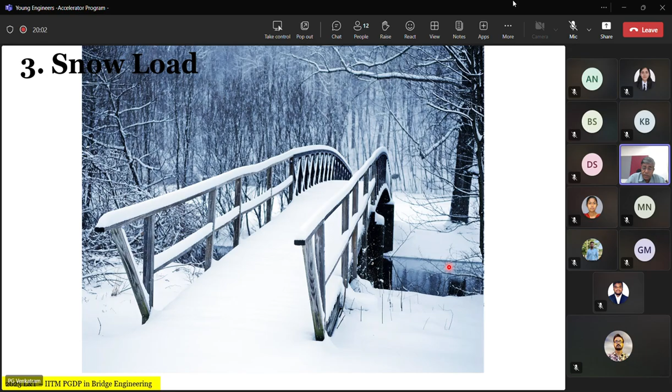So in our own code, as you can see in IRC 6, we have two conditions: snow load with live load, and snow load without live load. This picture gives you some incidence of what's happening when the snow is taking place. So what our code says is, if we have snow up to 250 mm, then you can consider that wheel loads and track loads are operating on the bridge simultaneously along with this load.

And if the thickness of the snow goes beyond 250 mm, then don't consider any wheel loads on it—only consider track loading. Which means what? Track load essentially for us is only the 70R tracked. And in the next case, when the thickness is more than 500 mm, then you consider...

No live load. Okay, so the question to ponder about in the previous one—why the distinction? What's special about 500 mm that you don't need to consider? Why have they said don't consider wheel loads when there is 500 mm of snow on the bridge? What do you think would be the thought process? What do you think will be the philosophy that comes up with such a recommendation?

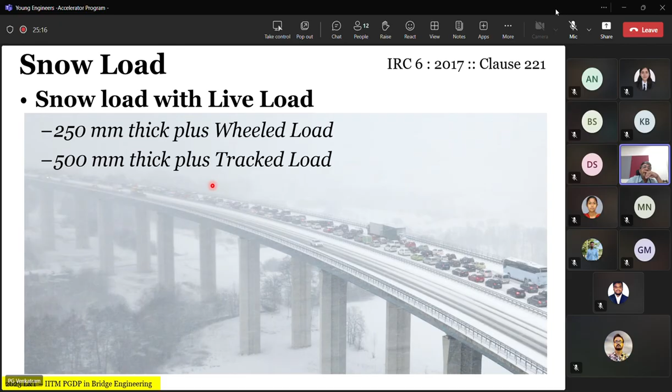So therefore, finally, more than 500 mm, the basic idea is you will stop all traffic. So that means, in such locations, you must have a monitoring system which measures and keeps indication of the thickness of the snow cover, so that it can warn the motorists not to go on the bridge.

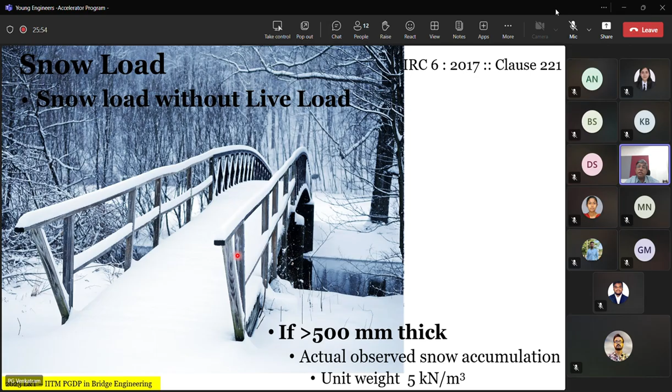Now, this has limited application in our country because most of our country is tropical in nature. Only sub-Himalayan regions, where bridges are located, might have problems or design issues linked to loading due to snow.

We move to the next force-based loading, which is the impact load. So what are the impact loads that you are aware of? If you recall, when we did the summary, we looked at vehicle collision on bridges, and we looked at floating vessels' impact on river bridges.

Now this impact loading is critical, especially if you have clearance issues. Our code has got certain requirements which say if you have clearances above this, or your substructure is so much distance away from the carriageway edge, then you need not consider it. Otherwise, you have to consider the impact of the moving vehicle on the bridge supporting structure, and sometimes on the bridge also.

Now, this vehicle collision load is essentially a force, and I take you back to your high school physics definition of how force is derived. We all know it's the rate of change of momentum. Momentum means you had a certain initial velocity and then you reduce it to zero. The more important component is the duration within which this impact comes to zero, and that determines the magnitude of the force.

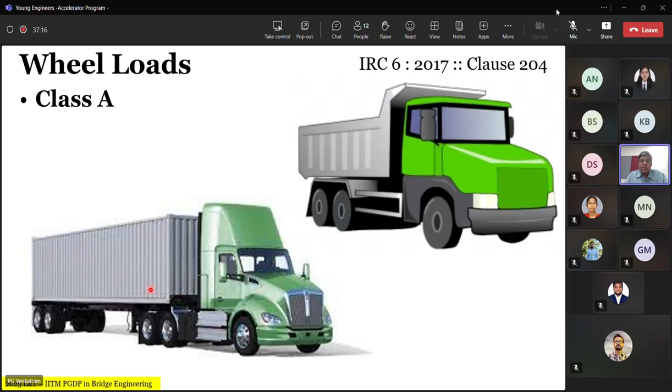Now, the design load is not considering any particular vehicle. It considers a variety of tractor and trailer units, and gives you a statistical equivalent. That is why you have two components to it: the lower component, called the main one, and the residual component, which is at the higher level.

All right, so ultimately, now remember one more thing about the impact load. We'll deal with that a little bit later when we talk about the design aspects of it. But right now keep in mind the important point: the force is lower if the time taken to reduce the momentum from high velocity to zero velocity is longer.

And for the time to be longer, what do you need? From a design point of view, what do you need? Do you need a very rigid substructure, or do you need a flexible structure? That means deformability is an important criterion.

Similarly, vice versa, to increase the time limit, do you need a very rigid vehicle, or do you need a vehicle that is more crushable? Difficult question.

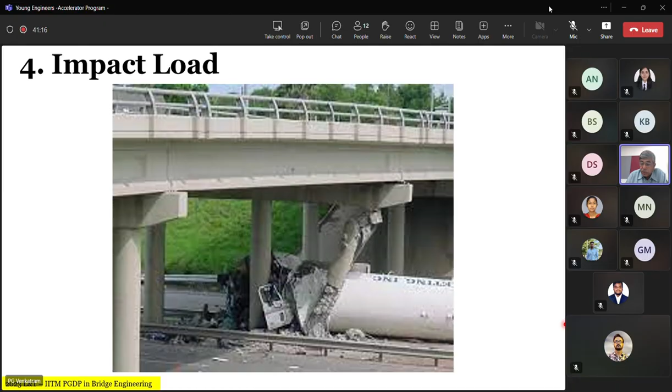The point is, sometimes, very rarely, they can also end up impacting the abutments. As we said, there are two components. The larger one we had an explanation for, and the perpendicular direction is a statistical equivalent, because velocity perpendicular to the traffic will be much smaller, only a component of the velocity. So it's only half, and basically it's a design prescription in the code.

Now, these are all for 60 kmph velocity. This is in our code. Now the question is, if we want to use the same vehicles at a higher velocity, what should be the impact force?

What should be the impact force? Let us say, as I told you, these are all prescribed on the basis of a crash test done at 60 kilometers per hour. But we have people who drive at 100, even higher. And if you go to European autobahns, there's no speed restriction, and you can even drive at 200 kilometers per hour if you feel safe enough.

Vehicles are also designed that way. Then what happens to this impact force? And how much will it increase? It will be directly proportional to the velocity, if you assume that the time of application of the impulse remains the same. But quite often at higher velocity, the time of application of impulse also changes, because with higher velocity and higher force, the crushing is faster, not slower.

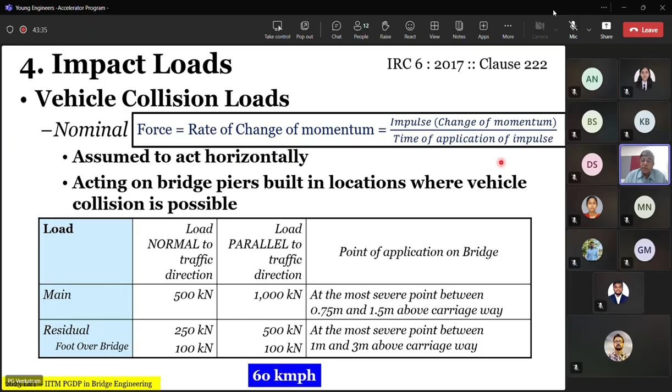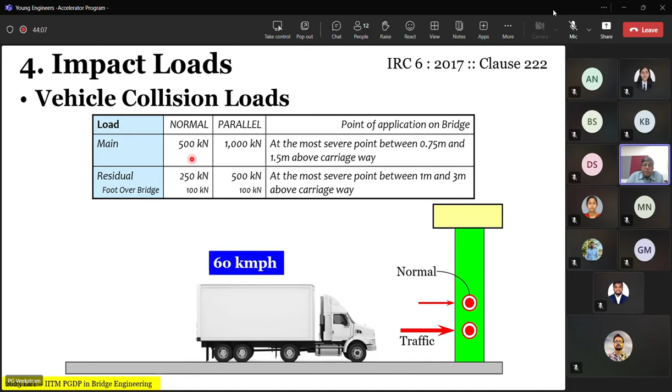Now, considering the effect of collision on bearings and foundations, but not on abutments, because abutments have a very strong earth retaining structure, and are quite often protected and far away from the carriageway. So the impact collision load on the structure is not significant there. The collision load on bearings is important because it can lead to dislodgement of the superstructure.

Now, the magnitude of the vehicle collision load on superstructure has a different definition, and it's normally not defined in our code yet. But if you look at the BS code or the Eurocode, they do have a definition of the impact load on superstructure. So for us, it primarily applies to substructure and foundations.

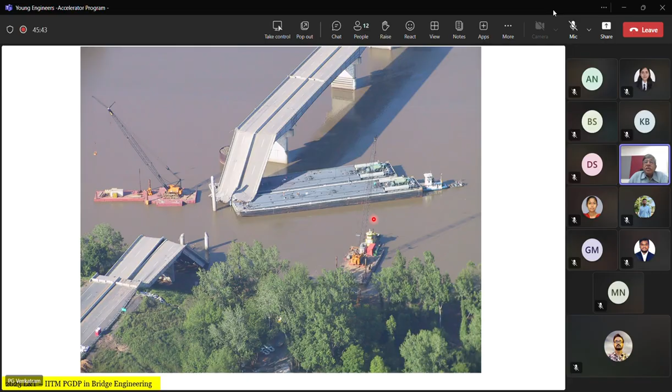You can see a number of examples. For instance, this bridge here has had its foundations protected by installation of additional impact bearing structures. Then you have a design of this nature where there is none yet, though normally it makes sense to do the construction at the time of the original installation itself.

These kind of structures, called fenders, help protect the bridge foundations from coming directly under the impact of floating vessels. They protect the bridge, and there are certain characteristics that these fenders must take care of.

One good example is an earthen fill island. Basically, if anything impacts this, it is deformable. And when it is deformable, the expression for force as the rate of change of momentum, which we discussed earlier, applies here also.

The velocities are relatively low, in the sense that generally at places where bridges are constructed and ships or barges pass below, velocities are in the range of 6 to 10 knots, which is around 10 to 15 kilometers per hour.

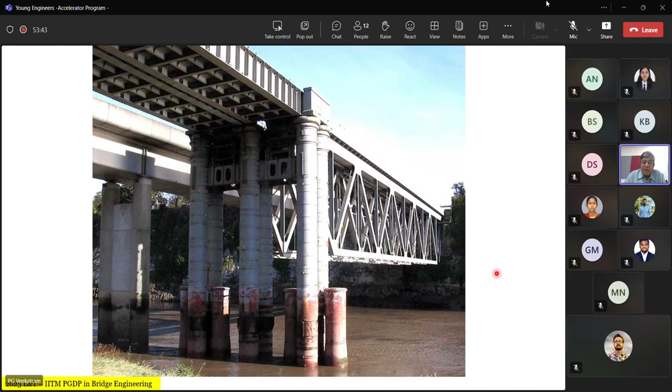It is bad. Okay, go back to this. This is good because they have built in inelasticity and deformability in this island. This is good because they have provided inelasticity and deflectability in these blocking structures which have a large gap from the main structures. Thereby they have to deform a lot before the ship or the floating body hits this, as is the case with this.

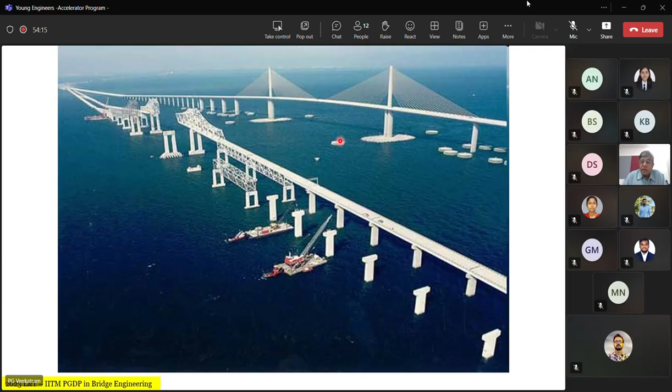Okay, remember one thing: it should generally be all around rather than one or two in one direction. So these fenders need to have a certain configuration.

So you have a floating body which can impact at its level above the water line, and it will undergo localized crushing and deformation - this is a barge type impact and this is the ship type impact. Ship can impact at the higher level, barge can impact at the lower level. So there's a whole range in which the floating bodies can impact the substructure and foundation.

To prevent them, we need to have an independent foundation. This is one solution, this is not the only solution. And the solution actually depends upon the magnitude of the force and the kind of vessels that are plying in the water body. So generally, conceptually, you have to have an independent foundation.

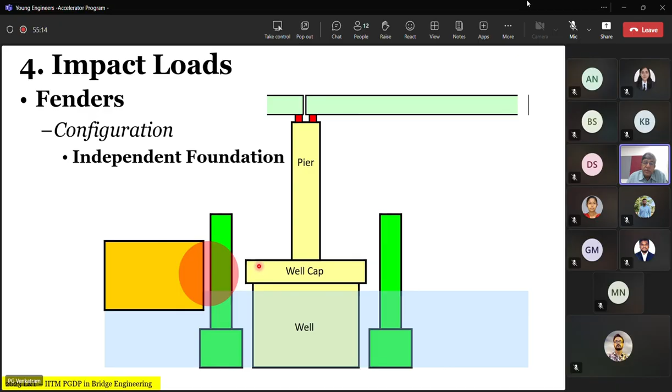There must be sufficient gap between them so that it deflects without hitting the foundation. Similarly, it should have a certain height so that it can handle both the low moving vessels and the high height vessels, preventing them from impacting this. So configuration is important, and the configuration will be decided by the kind of vessels that are plying in the water body. That is the important thing to note.

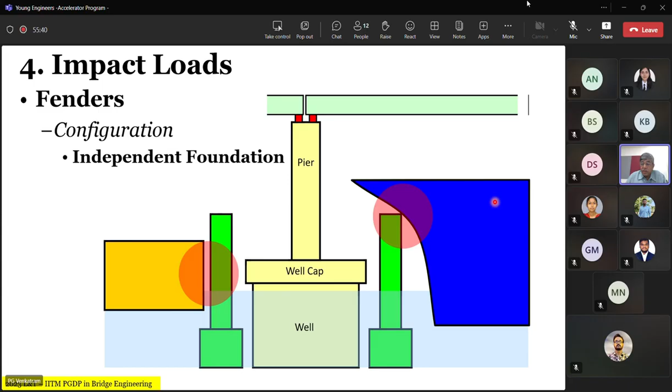Now our code, what does it say? It classifies the navigational channel into categories of different vessels. And our code says that it should act at a height 1 meter above the HTL. These are the forces defined in IRC 6.

Why are they designed like this? Because IRC 6 is not applicable for bridges built in marine conditions. These loading standards are built only for river bridges, wherein it is anticipated that only freight traffic in the form of barges will be carried out.

I don't know how many of you are aware - right now there is supposed to be an inland waterway operationally carrying freight more or less along the Hooghly, Calcutta, till Varanasi through the Ganges River, through the navigational channel created there. So it carries barges carrying cargo from the coast to the interior land. That is river water, obviously, because the depth of water in all seasons cannot be 15 meters, 14 meters - only 3, 4, 5, 6 meters is all that is guaranteed. Big ships cannot operate.

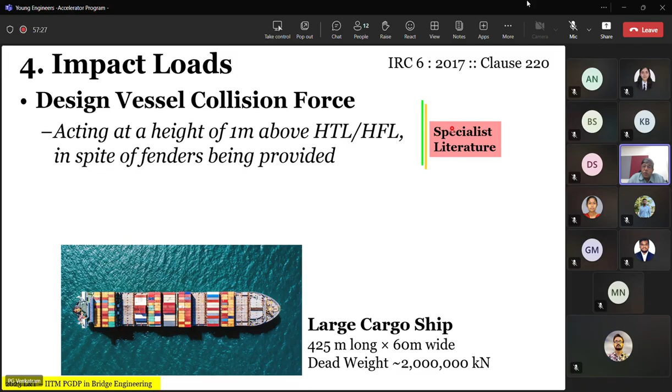So in India, our code is applicable only for barge traffic. We are not in a position to design for large cargo ships which can carry almost 2 million kilonewton dead weight. When you do this, you need to refer to specialist literature. But what does our code do? It designs the load into so many of these barge categories.

And the design forces in the various categories are given like this. And if I'm not mistaken, if the category of the water body is unknown, we are supposed to design it for a minimum of this category 3. I don't recall the code exactly, but this is the minimum requirement.

Otherwise, you will find out from the inland waterways notification which stretches of which rivers are categorized for what kind of traffic. In our case, the traffic classification is not based on the deadweight tonnage of the ship, but on the physical dimension of the barges. So this is the range - about 4,000 ton, 2,000 ton, and 1,000 ton. 1,000 tons is the bare minimum for any navigable river.

Now, this force also needs to be considered only in the design of foundations for what are known as navigational spans. It need not be applied on all substructures and foundations, only on the navigational span. That means there needs to be a definition of which spans are navigational, and that depends upon individual bridges.

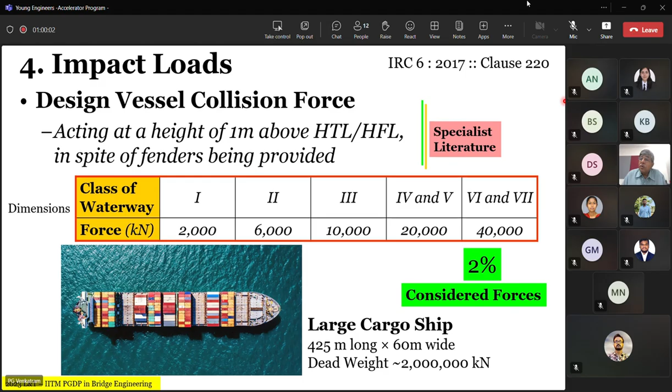Again, to clarify, the forces in our clause are given only for riverine traffic related to usage of barges. For actual ships you use the actual force, but for our code we use the design forces as given in the code itself for river bridges.

Generally, the good idea is to protect the piers by independently supported structures adjacent to the pier, which should have sufficient capacity to absorb energy before vessels hit the pier. Our foundations also have some residual strength, but the idea is that if the initial independent structure slows down the vessel and brings it nearly to a halt, even if it hits, it will hit with very low velocity, and the force transmitted to the substructure will be much smaller.

Therefore, it is essential to plan fender systems for the substructure and foundation adjacent to it, with sufficient gap between the real substructure and these systems, so you have what is called a distance of influence. You can have fenders, artificial islands, sacrificial caissons - fenders are for smaller forces. It's also possible to utilize the inherent strength of the foundation, but just prevent local damage by putting up a rubber arrangement which absorbs and slows down the impact. They stretch the time of contact so the velocity of the vessel is brought to zero over a longer period, reducing the forces. These are the special rubberized fenders, sometimes also used on bridge foundations.

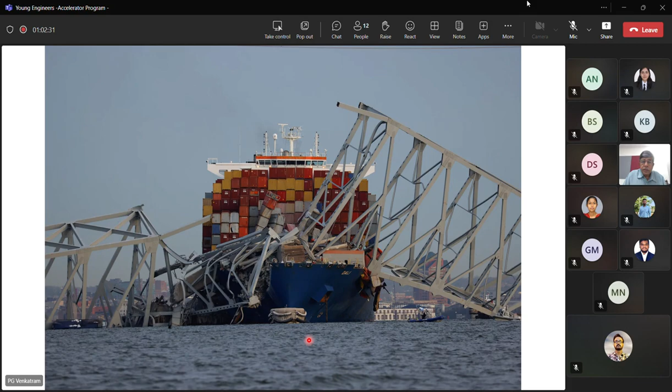So from ship loading, we will move on to the next type of force loading, which is wind loads. Wind loads are a little more complex than other force-based loading, because the response of the structure sometimes depends upon the stiffness of the superstructure itself. So wind load is not something with an absolute definition, though we do have a certain kind of absolute definition used in our code. But in a highly flexible structure, the response is much different to wind loads.

All of you would have seen this very famous - we'll come to the Tacoma Narrows Bridge a little later. Now, the horizontal forces due to wind in our code are specified based on the intensity of the wind velocity, and the force is calculated on the basis of the elevation of the bridge deck or substructure which gets exposed to the wind. As seen here, this is the basic criteria.

And in the case of parapets, if they are of the perforated or railing type, then you only have to consider the block, the obstruction area. That is a typical concept used when estimating the wind loads on the superstructure, the horizontal force of a specified intensity.

How do you get the specified intensity? That was for a bridge with a solid elevation. Now suppose the bridge is not a solid elevation, and it's like a truss. Then when wind comes from the transverse direction, the truss wind forces are divided into two parts. The one closest to the wind direction is called the windward truss, and the other is called the leeward truss. So the total area that sees wind pressure is the net area of the windward truss plus half the area above the deck of the truss, shielded by the windward truss.

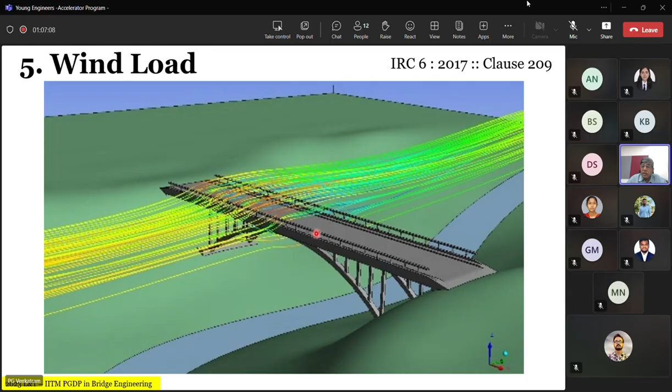By Bernoulli's principle, wherever velocity is higher, pressure is lower, and therefore lift is generated. So apart from transverse direction forces on bridges, due to the flow of wind around the deck above and below, you also have a possibility of uplift or downward pressure. Both are possible, and that's an additional force that needs to be considered. How to calculate it is defined in the code itself.

Then you have wind forces with the presence of live load and wind forces in the absence of live load. In the case of a roadway bridge, the wind force on the live load is considered to act 1.5 meters above the roadway, and you need to consider an additional 3 kilonewton per meter force on the vehicles itself. You have to consider this kind of force according to IRC6.

Rest assured that IRC6 is undergoing a significant revision. I don't know whether the revision is already published or not - it was almost ready for publication last year. So there will be significant changes in the wind code according to IRC6, which will be more in line with IS 875 Part 3, which is related to the wind code. That's what this code is going to slowly move towards.

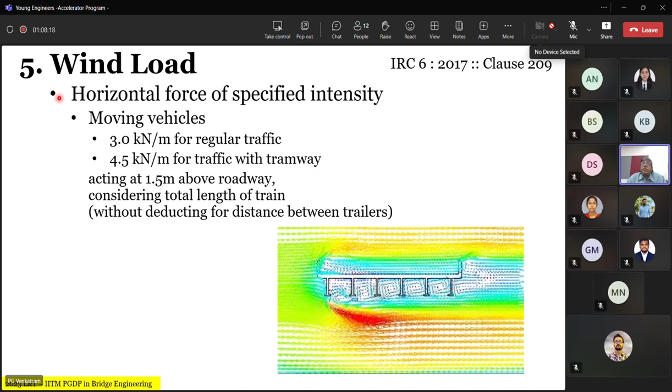So we have to consider the wind load on the cross section of the deck, the wind load's uplift effect on the deck, and the wind loads on the live load which is plying on top of the deck also.

Now, our code says that when the wind speed is more than 130 kilometers per hour - basically this is about 36 meters per second, I think, I can calculate and check - there should be no live load considered on the bridge deck, basically from a safety point of view.

When do you expect to see this kind of effect? You will expect to see it in the case of a severe cyclonic storm. Most of you may not have seen it, but those of you who live in Chennai or the East Coast could have seen this on a regular basis during the October, November, December season. There are a lot of cyclones that hit the east coast of India. In fact, at one time we have also seen wind speeds of 240 kilometers per hour, about 2-3 years back in the city of Chennai, when the cyclone crossed very close to the city.

Whenever the speed is more than 130 kilometers per hour, live load should not be considered, because live load is expected to be monitored and stopped - nobody would attempt to do it. But you can always assume there'll be a few people who will break these rules and still ply, but that's at their risk. Otherwise, as a designer, you don't have to consider live load whenever the wind is more than 130 kilometers per hour.

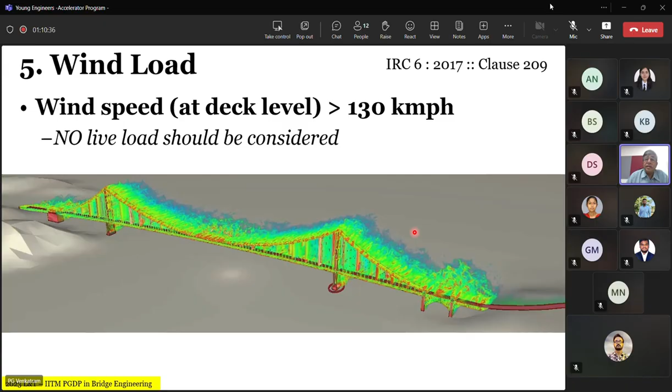In the combination of live load that you check your design for, if you are considering live load as the leading load, then the associated wind load should be calculated limited to a wind velocity of 130, or 36 meters per second. But if you are considering an empty bridge, then you have to consider the maximum wind load that can occur in that location. The maximum wind load map of India is there in the code itself.

We have basic wind velocities ranging from 33 to 55, and most of the 55 you can see is on the east coast and some parts of northeast. Otherwise, you have mostly 50, 47, 44, and a few interior regions which don't have much wind, so they are designed for 39 and 33 also. But significantly, 55 to 47 is the majority of the area, with 55 being mostly along the coast - I think a part of Gujarat coast is also included, because this is also cyclone prone. So these two are the zones where you'll see 55; otherwise mostly you will see 50 and 47.

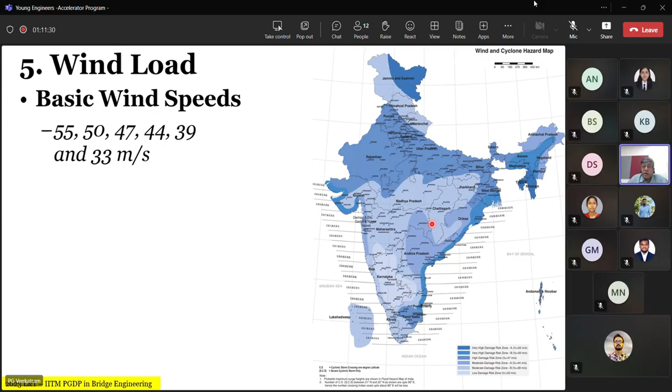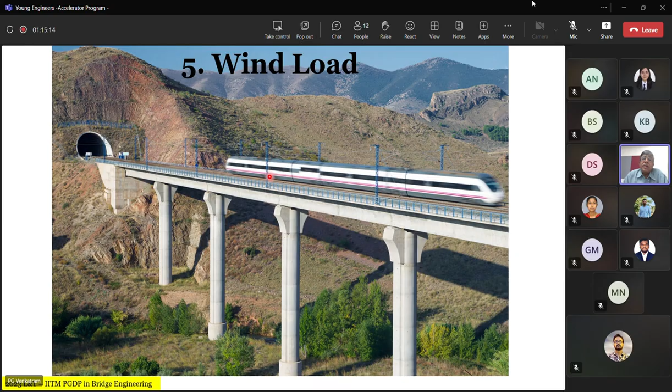Now, in the railway case, as you said, because you have this wind acting on the whole of the live load, there is also a stability issue. Railway operations are far more rigorously controlled during high wind situations, because high winds can lead to instability of the coaches itself, since the supporting bases are typically the gauge of the rail, and if they go very high, then they become problematic.

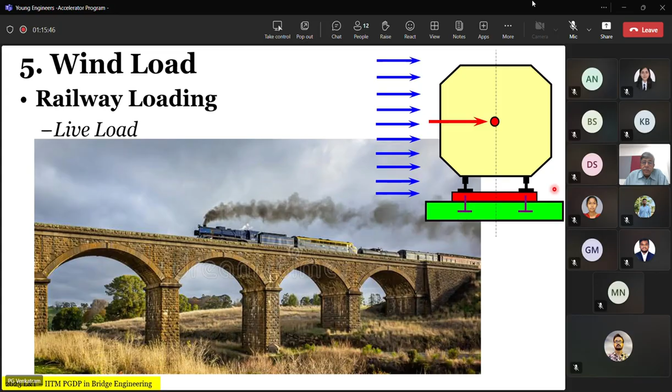So the structure's response to wind is a little more tedious because the wind introduces transverse shaking of the bridge. What does it mean? A wind blows and then if it stops, the bridge, due to its flexibility, will continue to shake. So that means there is a dynamic aspect to the wind.

It depends upon the natural period of vibration of the bridge deck itself. So when does this become important?

You can have resonance, that is a different matter. The question now is, for wind on bridges, what kind of natural period should we target? Large or small?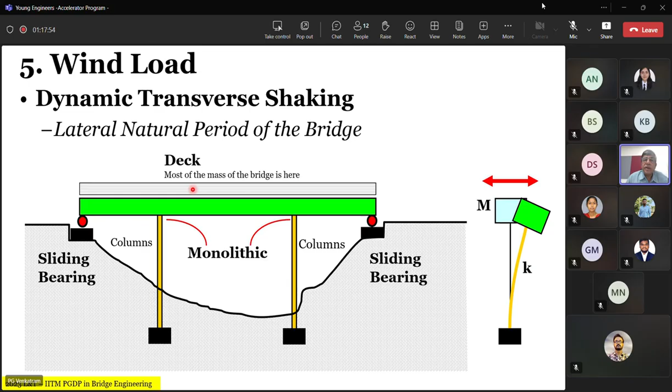So basically the lateral natural period of the bridge becomes an important factor. That means particularly for tall substructures and foundation systems in valleys, the dynamic aspects of wind become a critical issue. If you think in terms of a suspension bridge, the deck is here, and all the stiffness is provided by the stiffness of the vertical cable only. So this bridge has a very large time period, with large deflection possibilities.

For such structures, you need to do the natural mode shape analysis. All the natural frequencies have to be estimated, and then study the wind characteristics to prevent certain types of failures, related to resonance of the bridge deck with the wind velocities.

Now, the thing you have to remember carefully is that wind-induced resonance is caused when the wind flow is steady flow or turbulent flow. Wind-induced oscillations will become critical when the wind is blowing steadily or when the wind is blowing in a turbulent fashion — laminar flow or turbulent flow, if you want to understand it in those terms.

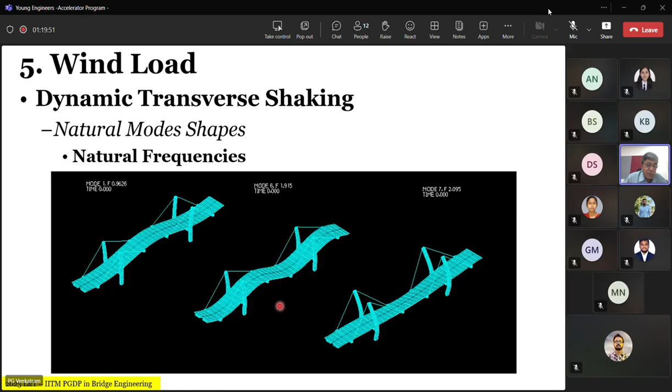Not sure. Okay, we'll park the question. We'll come back to it a little later when we have a better understanding of it.

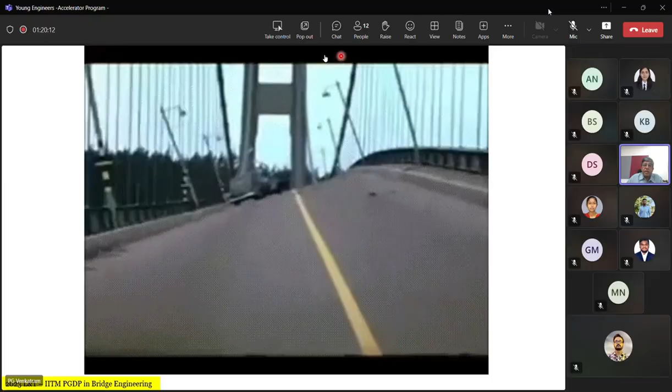Now, what you're seeing here is a very famous bridge, and you can imagine this kind of effect is introduced by bridge deformation. I will stop this and share with you another, much more famous video. I don't know whether you have seen it or not, but even if you have seen it, it is worth watching. But you should let me know whether you are able to hear the sound — that is more important.

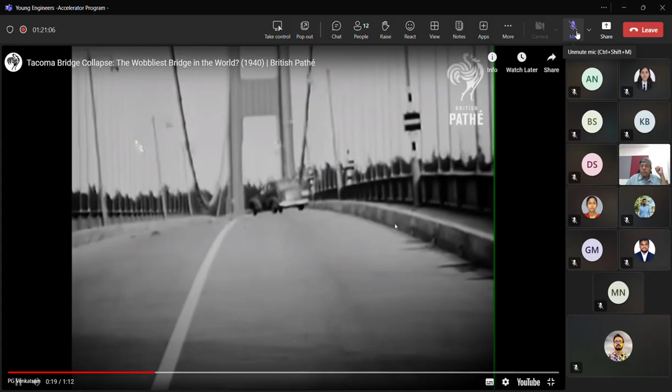Are you able to see the video? But are you able to hear the sound?

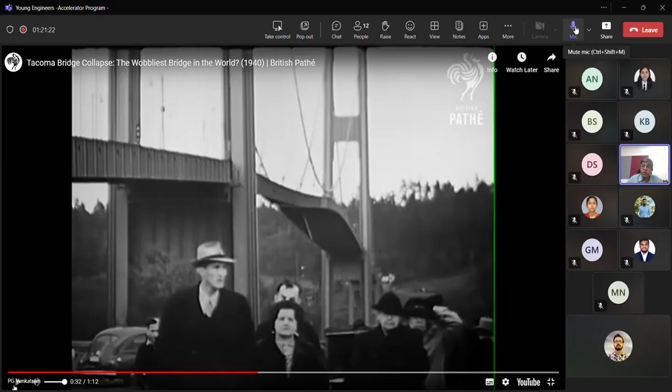Basically, what he is telling is this picture is taken when the wind was blowing at 35 miles per hour. Okay, 35 miles per hour. Remember that figure.

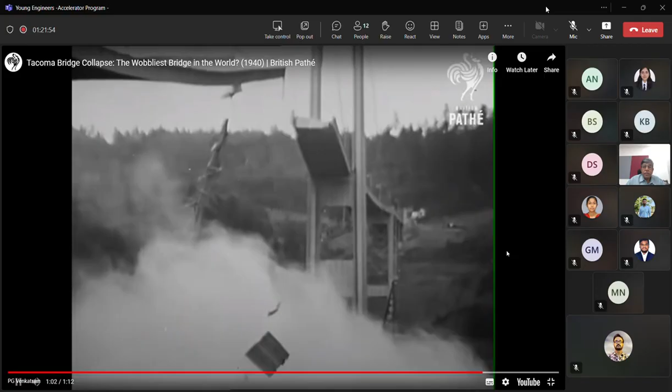So, 35 miles per hour. What do you think is the wind velocity? If you divide the miles, take the miles as 1.6 kilometers per hour, 35 miles per hour is somewhere around 56 kilometers per hour, which is a normal wind anywhere in the world. It didn't require that high velocity of 130 kilometers per hour, etc., to break this bridge.

Of course, this bridge was constructed in 1940. Within 6 months of its construction, this incident happened. They didn't understand the wind behavior, wind phenomena, the dynamic response of the wind that much better in those days. This bridge has been reconstructed with all the stability and safety features, but essentially the point to note is that ignorance can lead to this kind of a situation.

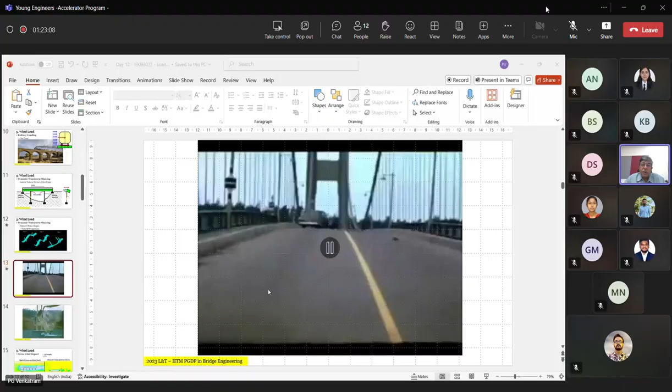Commonly, this is just an extract of the same video, but I didn't want to play this. So basically, this kind of a phenomena takes place. There are many phenomena like buffeting, galloping. We'll understand the terminology when we look at the wind load in little more greater detail.

So you see the collapse of the structure basically because the dynamic aspects of the bridge were not understood well in those days. And we are talking about 1940, that means we are talking about almost 80, 85 years back.

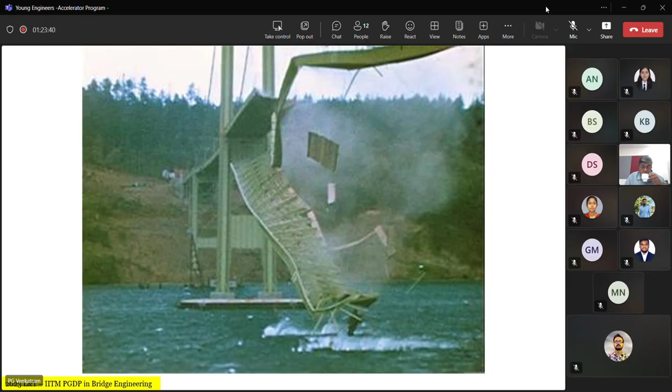So the crosswind impact, that is, 55 kilometers per hour speed, is only 15 meters per second. So you're talking about a very, very small level of wind velocity.

Whenever you have a cross section which has multiple girders, the kind of behavior that you noticed in the other Tacoma Narrows Bridge video takes place, wherein small eddies are set up and the bridge undergoes torsional swing until it exceeds the capacity.

So you should avoid this multiple girder kind of situation in very long spans. Your longer span should typically be a more or less aerodynamically shaped structure with a closed section, so that you avoid setting up this crosswind eddy oscillation.

Remember, an important role is also played by the designing and detailing of your crash barriers. And when I say this, if your structure is very stiff, this is not a problem. This is a problem only if your structure is very flexible, and therefore for flexible structures you need to do a lot of dynamic analysis.

If before doing any great amount of detailing you do the dynamic analysis, find out the primary modes, study them, and make sure they are all behaving at decent levels, along with the velocity at which they get triggered—if you understand that, then you can do the detailed design. Otherwise, you will end up wasting a lot of time.

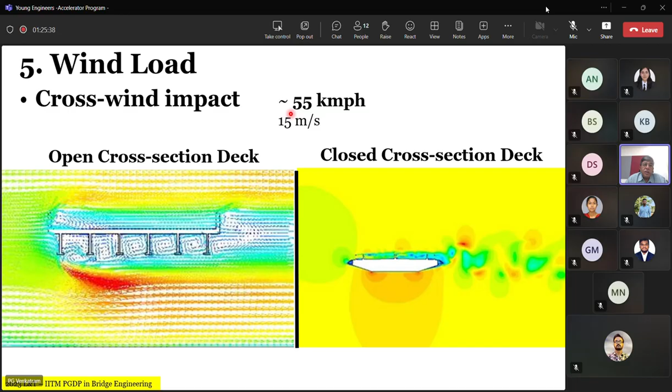But again, this is typically not required for most bridges, but definitely required whenever you go for longer and longer spans. Now, the transverse shaking that you saw is triggered by the presence of multiple girders.

Making this into two equivalent shapes like this is not necessarily a good idea. It still is two girders, and there is a space here, so you can have vortex shedding here. Ideally, you should shift to the third cross section for long flexible structures rather than ever go for this girder and slab.

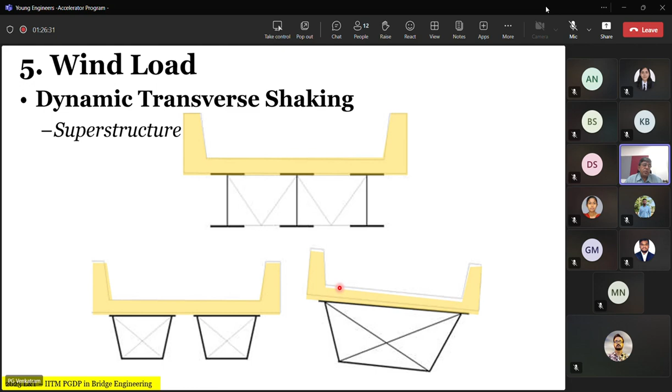It may be of interest to note that the longest span currently in existence in India, the Bet-Dwarka cable stayed bridge, had similar issues which were flagged during the wind tunnel testing of the cross section. They had to introduce what we call aerofoil sections in parts of the bridge to alter its dynamic behavior so that resonance doesn't set up.

Okay, so moving on from wind load, we move on to water loads. Water load has got multiple effects that we need to consider. As you can see, these bridge piers are an obstruction to the flow of water. When the water goes around it, naturally it will cause a direct force on it, called the water current force. There are other additional effects that also come about due to the flow of water around it and the presence of water itself.

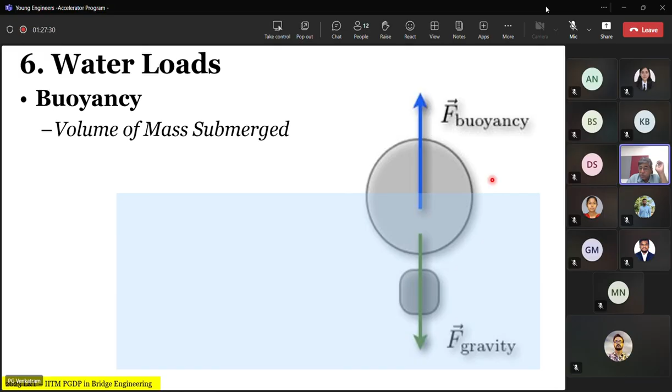One of the effects that comes about is the buoyancy. Buoyancy, as you know, counteracts the gravity effect. It has got different implications in different locations, and Archimedes' principle is used to determine its effect on the structural component.

So when you take a bridge like this, if the superstructure is submerged in water - I'm using the word 'if' because we are theoretically allowed to design submersible bridges in our country, but nowadays very few people design them, so we always want to design high level bridges. Superstructure is never submerged.

But if it is submerged, what kind of buoyancy effects must you consider? First we look at the substructure. When it comes to foundation, you must consider the buoyancy effect on 100% of the components submerged in water. But when checking the structural design of any RCC or masonry structure, we need to consider only 15% of the buoyancy effect on those components.

Say, for example, we want to check the stresses at this location, at this level. The amount of substructure submerged in water is this. Then the buoyancy effect to be considered there is not 100% of the volume of fluid displaced, but only 15%. This rule is given in the code primarily because we are designing these structures as cracked sections, and because of the cracking, there could be pores through which hydrostatic pressure can apply. We estimate that the pores will not be bigger than 15%. That is why for structural design of substructure you take 15%, but for the base pressure check, you take 100% buoyancy.

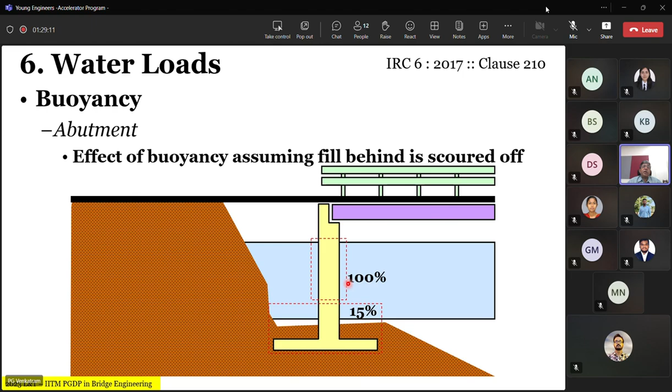You need to consider it for the superstructure also in case the water level is above the superstructure, as may be the case with submersible bridges. So you take 100% for the superstructure also in that case. It's a very specific case when you are doing submersible bridges.

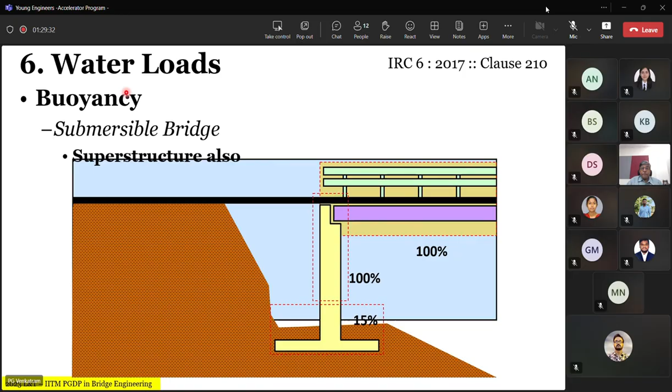Now there are other forces that will happen. There is a hydrodynamic force, which is a dynamic effect, particularly occurring when the foundation is subjected to vibrations and displacement in water. Due to the dynamic effect of water flow around the pier itself, you end up creating a horseshoe-shaped hole, called the scour hole. This scour happens additionally around the pier because the velocity of flow is altered.

As we saw, in any transverse flow these obstructions reduce the area, so near the pier the velocity is higher than elsewhere, and again the velocity reduces as it goes out. This effect vanishes some distance away from the foundation, where the velocity goes back to the average. So there will be an average scour, but there are localized scour holes around the pier.

It is generally in the shape of a horseshoe, caused by the fact that higher velocity water, when it comes here and suddenly finds a lower velocity, sets up what is called vortex shedding or an eddy current in a clockwise fashion, and this erodes additional soil localized to the foundation. This effect leads to very large erosion close to the substructure, reducing as we go further away from the foundation.

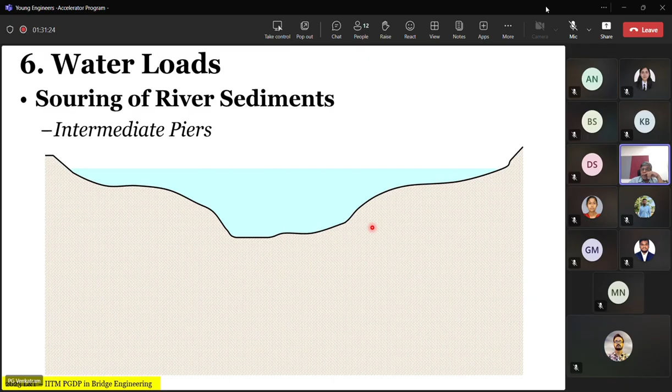So typically, let's say we have a bridge and we assume this is a stable bed, but when you put the bridge piers in it, you are creating an obstruction. This creates something called additional scour overall. This overall scour could also take place if the bed is silted up, and during the flood the velocity is sufficient to remove the silt. This may be the case even without the bridge, but with the presence of the bridge pier...

What happens is there are localized scours which go deeper - not necessarily right up to the well cap as I've indicated, but something additional will take place. Due to this you lose soil resistance in that zone, which is critical for our foundation design. That's the whole point in understanding that apart from the direct physical force created by water, it has other effects such as scour to be considered in the foundation. This is not so much a load, but an additional effect that comes out of the presence and flow of water.

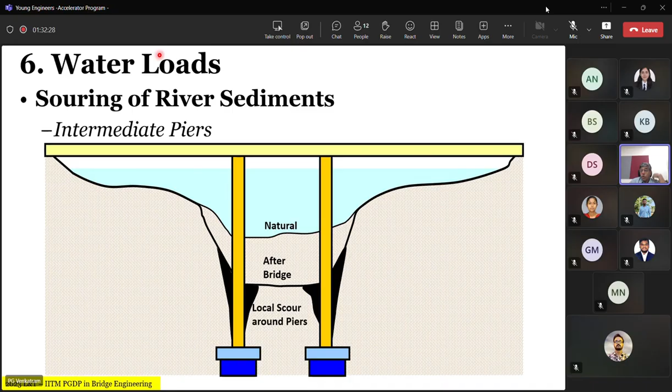This flow of water can also affect the embankment. It can erode embankments when the water flow is like that, and when the eddy current takes place, it can erode the downstream toe of it, which needs to be protected.

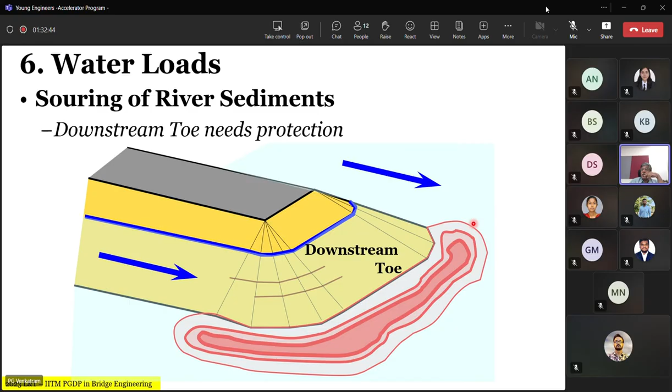How do you calculate the water pressure? Just like wind pressure is directly proportional to the square of the velocity because it's also based on the laminar flow concept, water current force, the pressure, is proportional to the square of the velocity, into a constant. This K is the pier shape factor, we call it.

So if we want to look at the water current forces, we have very little say in what we can do about the velocity because it is controlled by nature. But what we can control is the amount of force that comes on our pier, by controlling the shape of the pier.

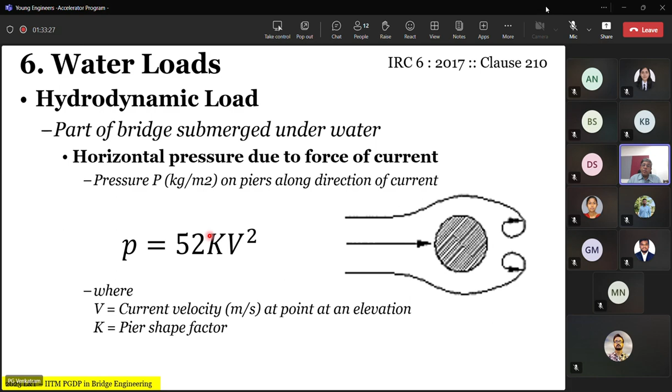When you look at the shape of the pier and the values of various shapes, the smallest one you get is a triangular cut and ease water. That means you have a triangular shape, and if you have a curve as part of an equilateral arc of a circle instead of straight, that kind of shape has the least ease water value. Simple triangular is about 0.5 and it probably goes up to a maximum of 1.5 for square sections, which are absolutely rectangular to the flow of water. When that happens, the force increases.

As engineers, we only have control over the shape of the pier. If you take a circular or semicircular section, our K value comes down from 1.5 for a square to 0.66. That's why generally in river situations, we tend to go for circular sections. Though technically, from a structural engineering point of view, circular sections are not very efficient, we still use them to reduce the water current forces where significant.

The variation of water current forces over the height is defined in the code as linear with V square. V square is linear from maximum at the surface to 0 at the bottom. Basically, from the hydraulic study, you will get that kind of result. Therefore, if you know the mean surface velocity at different heights, it is proportional to the square root of x from the top, x from the bottom, to h itself.

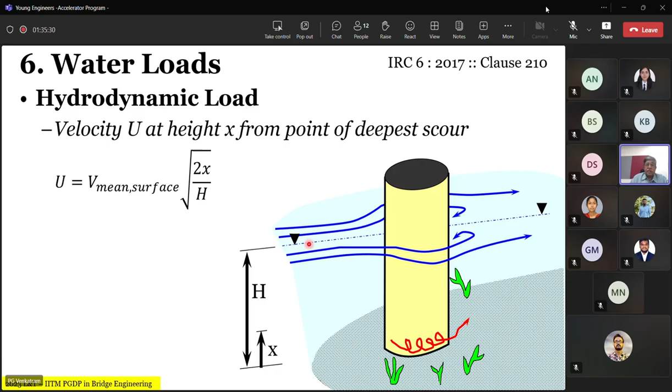So this is how you get the velocity variation. But if you look at V square, you will get it as linear from 0 at the bottom to the maximum at the top. That's how you get the square of the velocity variation, and therefore the pressure will also vary linearly because it's proportional to the square of the velocity.

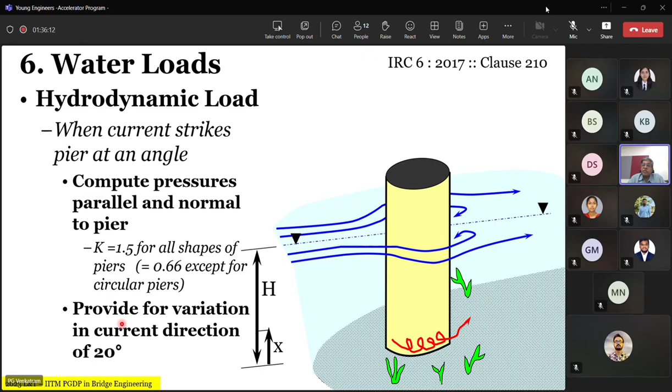The code asks us to consider the transverse direction of water flow and also a 20-degree inclination in the water flow, because our bridge piers may not necessarily be aligned perpendicular to the bank. Also, since rivers are not absolutely straight and keep meandering, there's always a component of water flow not directly channeled perpendicular to the bridge; they may have a small inclination. To cater for this variation, the code asks us to consider a 20-degree inclination to the force as an additional load case.

Then we move on to the seventh type of pressure loading, force loading: the earth pressure. This comes about due to any retained structure. When we have a retained structure and a fill, we have earth pressure. We have a number of theories, Rankine's, Coulomb's, etc., to tell you how to calculate the pressure. The code also gives expressions for that. The soil fill behind an abutment is a classic example of earth pressure we have to consider.

Generally, the abutment will be the one primarily affected in our bridge structure. The code also says under no circumstances should you design any retaining structure for a pressure less than 4.8 kilonewton per cubic meter density, meaning an equivalent hydrostatic pressure considering the fluid has that density. You should not design for anything less than that.

You have Coulomb's theory for non-cohesive soil, Coulomb's theory with Bell's correction for cohesive soil, and then Rankine's theory for soil at rest. These are the various theories given in the IRC to withstand active and passive resistance.

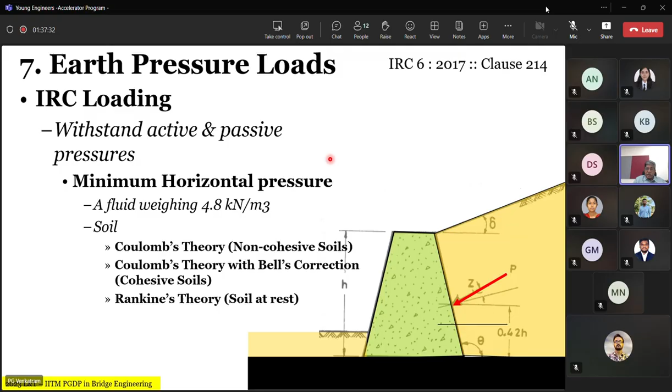In a non-seismic condition and in a seismic condition, we have the pressure. In the case of a passive condition, alpha is a value related to the slope of the wall face, and beta is the inclination. These are the pressures in a non-seismic condition. A modification factor is given for the seismic condition, introducing an additional parameter called lambda.

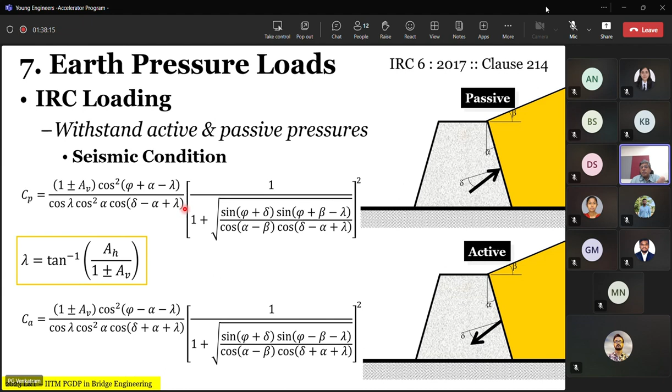What is the effect of this seismic condition? We'll see in the next slide. I'm going too fast because these formulas are all given in your code itself.

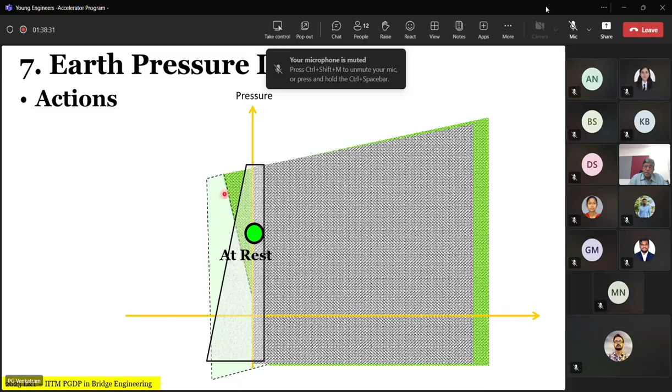Generally you have earth pressure at rest, so you tend to use Rankine's theory to calculate the pressure. But if the earth moves towards the wall and it tilts, active pressure is generated on the wall, and in case the wall pushes against the soil, then you have passive resistance developed in the soil.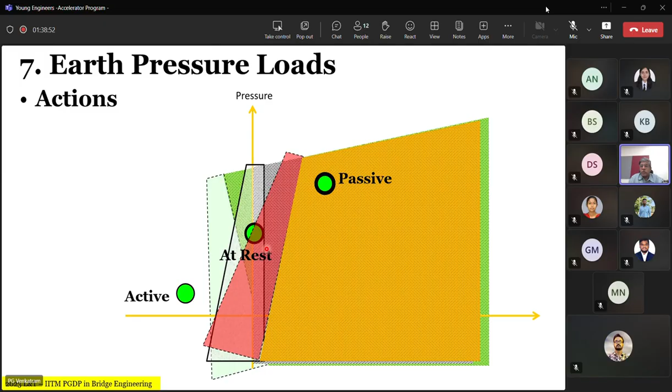The pressure develops like that, and when the ground acceleration is downward—that is, the earth is accelerating downward during a seismic event—the active pressure increases and the passive resistance decreases. This is the principle you need to remember clearly when using the expression.

Obviously the roles will reverse in case the acceleration is upward, and in a seismic event, both upward and downward acceleration are possible.

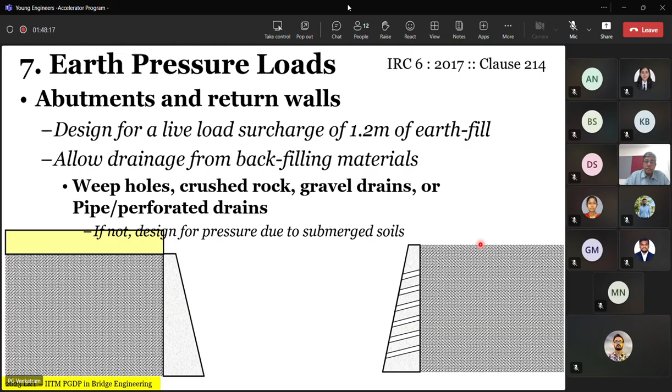Now we come to the next load, which is the blast load. As the term indicates, the blast load is caused by an explosion. An example you can see here, an explosion has...

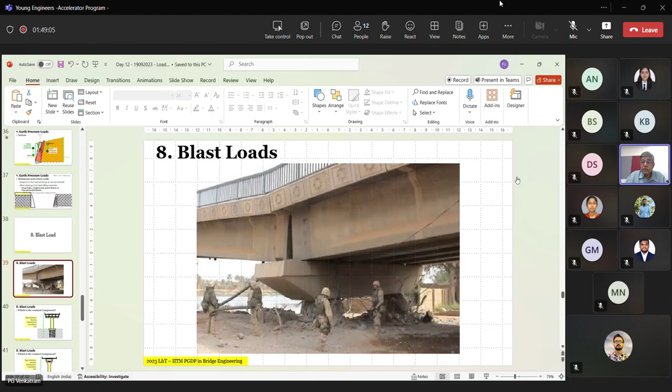That's an example of a blast at the substructure. The concrete is gone, and therefore the whole thing has sunk down.

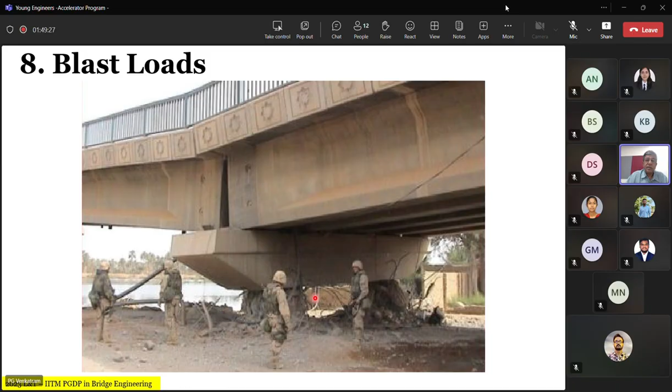What is the effect of a blast loading? If you look at it, go back to our summary of the components of a bridge system. Can you suggest which is the weakest component in this whole thing? We have superstructure, bearing, substructure, foundation, and soil. Among all these five components of a bridge system, which component is the weakest?

Why? Why is it the weakest?

Others know the answer. What is the reason they think? Do you agree with Sukulen that bearing is the weakest? Does anyone have another opinion? Yes, please. Why is bearing the weakest? If you agree, why? If you disagree, what else is the weakest? What happened today, everybody is silent? Okay, you think about it and get back to me later to tell me why you think bearing is the weakest.

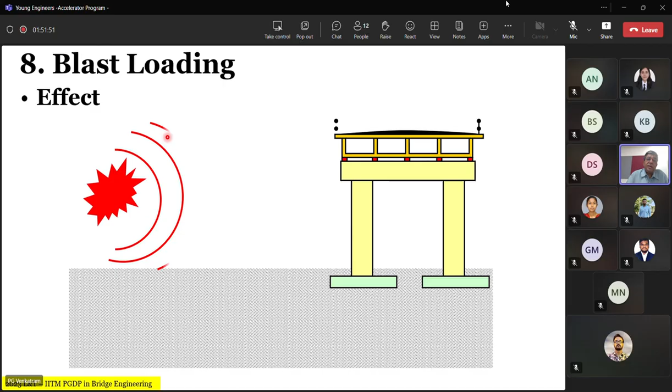Typically, blast is in the air. Essentially, blast is a pressure wave created in the air initially. Whenever we have an explosion, a primary pressure wave starts, and then this pressure wave hits the ground, and the ground starts vibrating. So you have two sets of effects: one is the primary pressure wave from the blast, and the other is when the blast hits the nearby ground, the ground also starts to shake. So you have two effects that are transmitted.

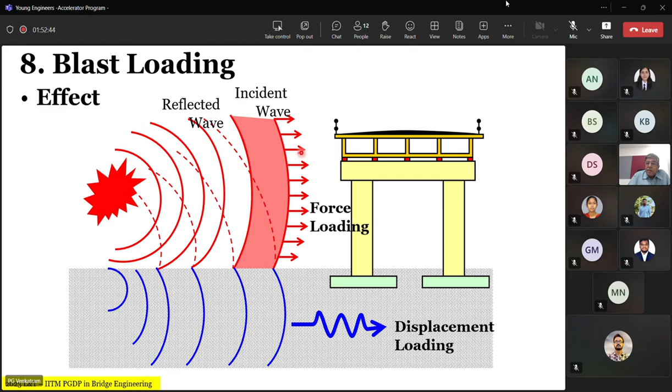Then there's unfortunately a third effect, and this translates into force loading and displacement loading. Part of this wave is also reflected from the ground, and this is called the incident wave and the reflected wave. This reflected wave causes quite often more damage than the incident wave. To understand that, you have to study the variation of these two pressures with time. There's a peak positive pressure and a peak negative pressure for the incident wave, and for the reflected wave, you have a higher peak positive pressure and a higher peak negative pressure. That is why the reflected wave is more dangerous than the incident wave itself.

The point to ponder for all of you is, why is it so? I want you to do your own independent reading and let me know why you think the reflected wave is more critical than the incident wave.

You must also notice that there is a positive wave pressure zone and a negative pressure zone. Remember, this whole incident takes place in milliseconds, the blast timing. So there is a duration of positive phase and then a duration of the negative phase. Both need to be checked to ensure our structure is safe.

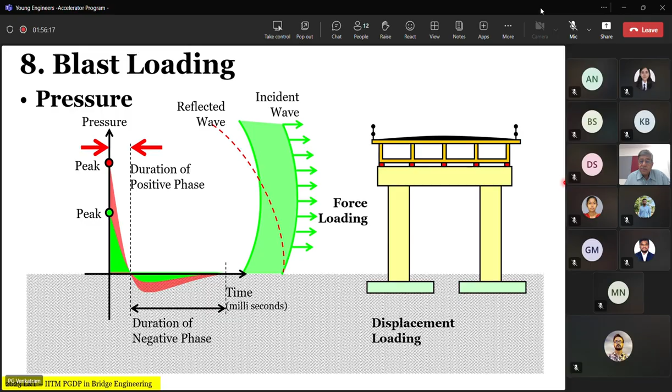Do you have any idea? In terms of, if you have to define an equivalent pressure for live load, what kind of pressure do you think you design for?

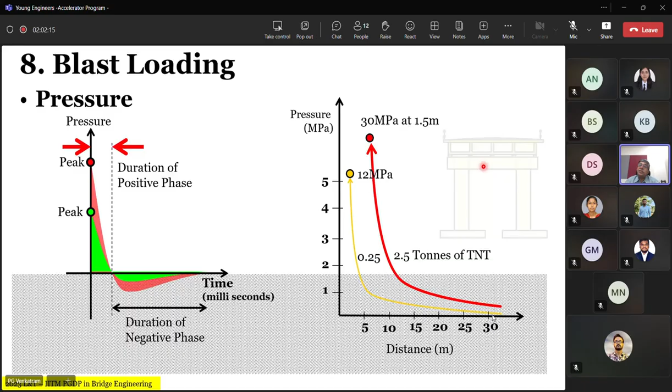However, it's only a theoretical design. Obviously, if somebody knows that a particular structure is designed to resist, say, 1 ton of TNT explosion, to destroy the structure he'll bring 2 tons. Then what do you do? You cannot do anything about it, right? So it's important that the magnitude of the explosive and the distance from the structure be defined by the owner of the facility before you can even carry out the so-called inelastic or plastic design.

We move on to one of the last loads, the construction load. You have seen some part of it, most due to the equipment that operates during the construction phases. Also, based on the sequence of loading, you may have loads of one superstructure or another temporarily, and they also have to be considered.

So the construction stage loading depends upon the construction methodology to be followed. So all of you, before commencing the construction load analysis, should first agree what should be the construction method. Whom do you agree with? Not amongst yourselves, but with your contractor, client, or owner, whoever is willing to take the decision. And depending upon that, assess all the loads and check all your design for that.

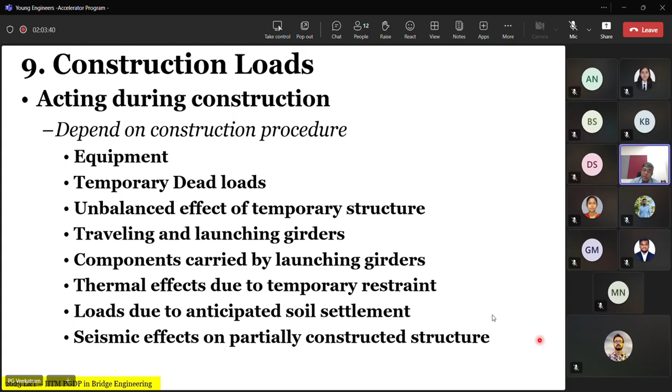So during construction, what are the loads that are possible? Depending upon the construction, you will have equipment load, temporary dead load, unbalanced effects of temporary structure, traveling and launching girder, components carried by the launching girder, thermal effects due to temporary restraints, load due to anticipated soil settlement, and seismic effects on partially constructed structure, which is defined in the code.

And the last of the loads, which we talked about last time, blast loads, now we come to discuss the pre-stressing load. Pre-stressing load in the new code is to be treated as an equivalent external force. The only difference between other axially inducing forces and pre-stressing forces is that it cannot cause buckling.

Are you aware of the fact that pre-stressing forces cannot cause buckling in spite of being a compressive load? How many of you know that? Or how many of you believe that pre-stress can also cause buckling because it's compression?

Nobody wants to take a position. Can pre-stress cause buckling? I make a statement: pre-stress can never cause buckling, though it's compressive in nature. How many of you agree? How many of you disagree?

Propose. Why do you say it's not an external force? You look at your code. Code is now telling you that it is to be treated as a force only.

Yes or no? It is not a different material. Do you agree that pre-stressed concrete is no different from reinforced concrete as a material goes and as a design rule goes? However, there is one significant behavior change with respect to pre-stressing as loads when compared to other axial loads: pre-stressing doesn't cause buckling.